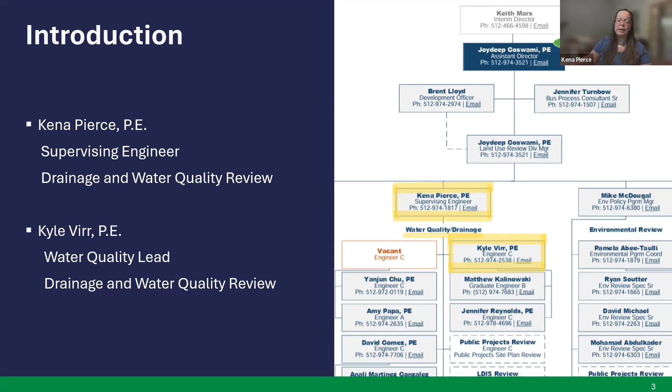Our team is housed in the Land Use Review Division in the Austin Development Services Department, and we do water quality and drainage review for site plans, subdivisions, construction plans. We do grading and drainage for residential review. We do zoning, easement releases, and license agreements, among a couple of other things. So we do a lot of drainage and water quality review for applications at the city. We're the main group that does it.

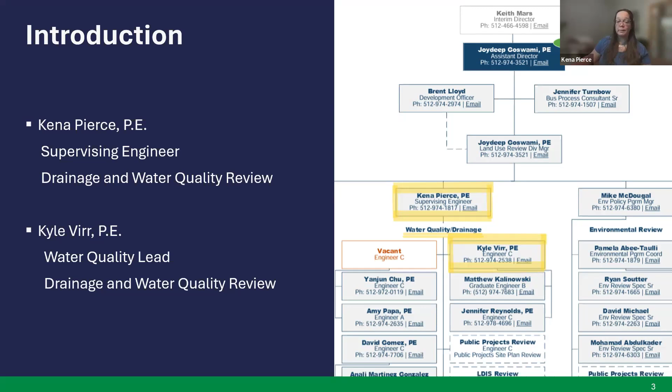Drainage and water quality is basically regulated by Austin Watershed Protection, but the review group for the code and criteria is housed in the Austin Development Services Department. And here's our little org chart. So I've got about 13 people on the team. So we're here to talk about stormwater today, and then specifically water quality.

If you are not in the industry, you might not realize that stormwater quality is different from wastewater, and it's different from water. Water and wastewater are regulated by Austin Water Utility. Stormwater in the city of Austin is regulated by the Austin Watershed Protection Department. They are two separate things, regulated by two separate entities. And the stormwater quality code is in Title VI of the Code of Ordinances. A lot of that has to do with point discharges and water from industrial sources.

And then there's Title 25, which is the Land Development Code, and it's regulated under the Environment section, which is Chapter 8. So regulation to address pollution in creeks, lakes, and aquifers associated with business activities and stormwater. We want our water quality to be really great when it goes into the creeks, so we have these regulations to protect our environment. And there's different categories of ways you can look at protecting and regulating it. One of them is the point source category.

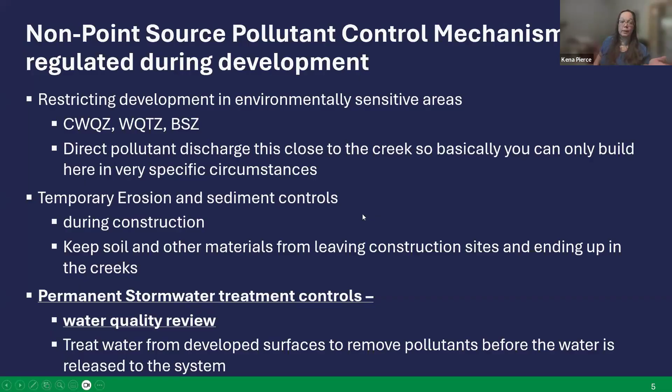So we're going to just talk a little bit about stormwater basics, treatment basics. This is super duper shallow, but you might be like, well, where do these stormwater pollutants come from? Basically, we're talking about increased pollution due to development.

So when you decide to put up a big giant store that we all love to go to, you are taking that green land that was there and covering it with asphalt, concrete, building. All of this is called impervious cover because it prevents water from infiltrating into the ground. And all of this impervious cover increases the concentration of pollutants on that property from daily use.

Think about taking your car, and I'm going to Walmart and I got my 2006 Honda CRV and it has a little oil leak. Well, then it leaks on the ground, water falls, and do we want that stuff hitting our creeks? The answer is no. So development just inherently can increase pollutant concentrations.

Again, the next one is like rainwater falls on this development, this impervious cover, picks up these pollutants and carries them off site. Where do they go? A lot of times you might not think about it if you're not an engineer, but it goes to the storm drainage system, which consists of pipes. It can be creeks, lakes, and this is called the gray funnel.

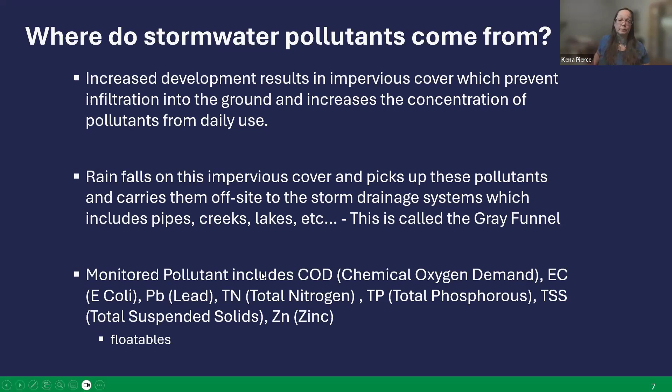Some examples of modern monitored pollutants are in the last bullet point: chemical oxygen demand, E. coli, floatables, phosphorus, and nitrogen. So these are the things that we're interested in. And how do we get these things out of our stormwater before it leaves the site? And there are 3 ways that we can do that.

In general, the first way is sedimentation, where the water comes into your pond and then all the pollutants basically settle to the ground. This is very common in wastewater and water treatment too. So settling of pollutants that are suspended in the water, and you have to make sure they're able to stay in that sedimentation basin long enough to have the pollutants settle out, which is a function of settling velocity and time in the basin. Another way to remove pollutants is through filtration.

And then a third way that we can help keep pollutants from leaving the property and entering our creeks is basically through infiltration. And you're like, well, what about groundwater? We can talk about that later. That is not shown on this slide, but this is really common in the Barton Springs zone.

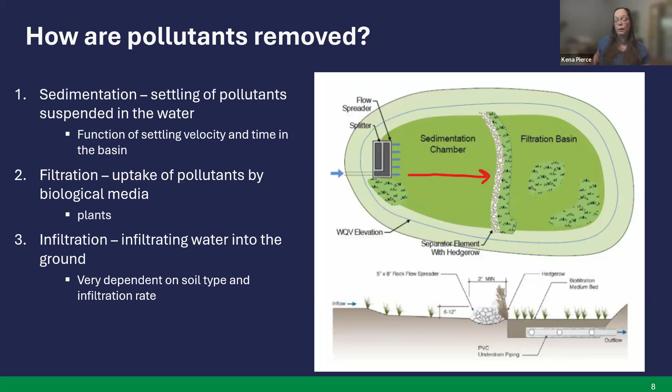So we're interested in removing pollutants from our stormwater. They're a result of development. And how do we regulate that development? We regulate it through site plan applications and subdivision applications. And when you come in with your application, my team gets it and we review it. And we decide whether water quality controls are required based on these rules in the Land Development Code.

Again, it's Chapter 8, which is titled The Environment. And if you look in this code, there's so many rules, but you can go to 211 and be like, does my development require water quality controls? And if you look at point A, if you are developing in the Barton Springs zone, then you require water quality controls.

So there's a very sensitive part of town called the Barton Springs zone. We have this blind salamander there, and we are very worried and making sure we are very sensitive to and making sure that it is able to thrive, right? So if you're in the Barton Springs zone, it doesn't matter the size of the development. You can put a giant store or you can put a little bitty gas station. You're required to have water quality controls to mitigate the pollutants leaving your site as a result from the development.

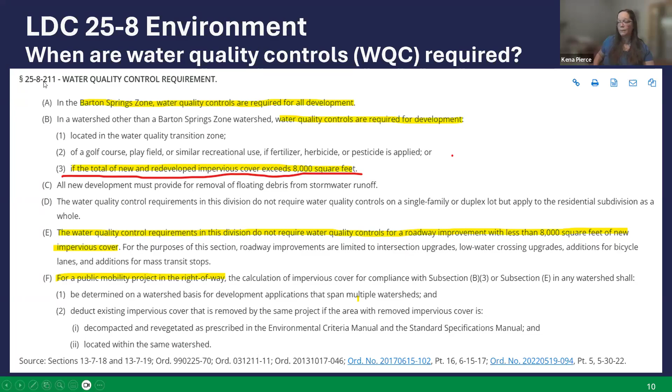Well, it depends. Like if you're at Wheatsville on South First, on South Lamar, you're not in the Barton Springs zone. If you're across the street at the Starbucks, you're in the Barton Springs zone. So it's very dependent on the geology, and it's basically all the area of town that goes to this one discharge point in Barton Creek. And then you're in the Barton Springs zone. And if you're in the Barton Springs zone, you are required to do water quality control.

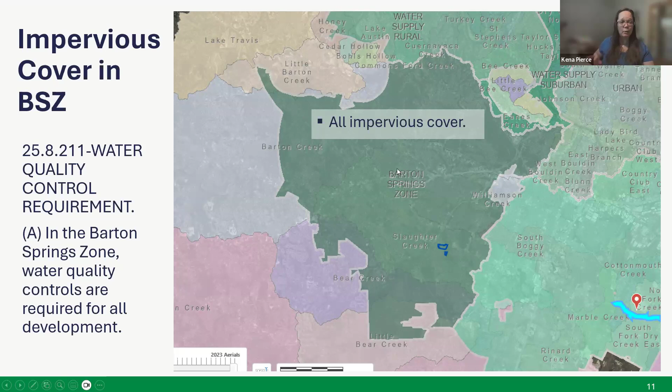So I just want to show you a picture. If you're on the east side of town, you're good. North side of town, you're good. Southwest, it's a little dicey. You might be in the Barton Springs zone.

I'm only doing 2,000 square feet. I have a small store and 4 parking spots. Outside the Barton Springs zone, don't need water quality controls. It's only 2,000. Inside the Barton Springs zone, need water quality controls. And then there's the threshold of 8,000. It doesn't matter where you are in town, water quality controls are required.

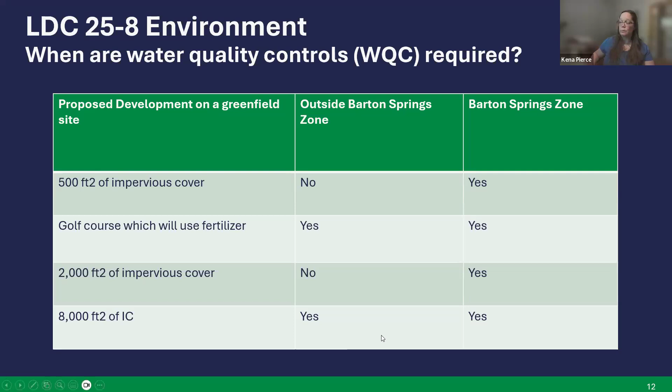We get this a lot. A development application comes in. They didn't realize they needed water quality controls. They didn't plan for it. Oh, can we get out of water quality controls? And the answer is no. You have to provide water quality controls if you are required to provide water quality controls.

Section 8 in the LDC has little caveats, they call them variances. So you must provide this unless you meet this condition, then you can get a variance. And that's in section 25-8-41. There's nothing that gets you out of water quality controls in that section.

And then there's another section of also potential variances. And there's nothing in there either that gets a development out of water quality controls if they need to provide them. So that is a difficult conversation sometimes to have. But water quality controls are very important to the city of Austin.

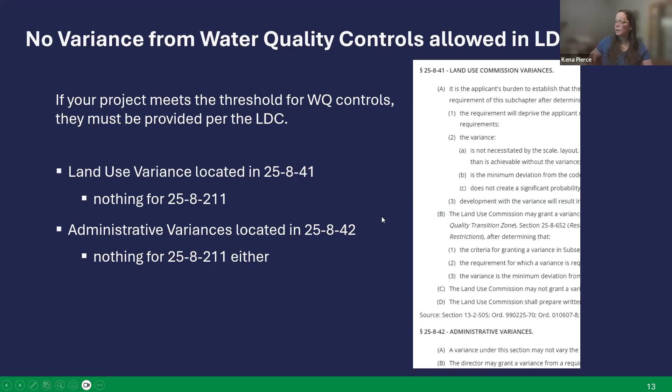This goes back to, I have to provide water quality controls. There's nothing in the code that gets you out of water quality controls. And just so you know, there's no way I can waive your water quality controls. Austin Development Services can't say, you know, we understand you, we don't think you need it. That doesn't happen because you have to provide water quality controls.

The regulating department, Austin Watershed, is the authority for the water quality control requirements. And they're going to expect you to provide water quality controls, but they do have a couple of ways where, instead of providing the ones that we usually see in the city, you can provide something else. And that's called an innovative management practice. And that's in 25.8.151. And there are lots of rules for that. Basically, you're still providing water quality controls, just a different kind than what we usually regulate.

Another item that I've seen come across my desk is alternative equivalent compliance. So say you are providing water quality controls, but they're just a little different. Maybe you're using something that we don't usually see used in that fashion. For instance, the airport has all these rules about not encouraging birds or wildlife. Well, a lot of our water quality controls are very popular with birds, wildlife, bugs. So they have to have special water quality controls that basically don't attract that kind of thing. They still have water quality controls, but it's an alternative compliance.

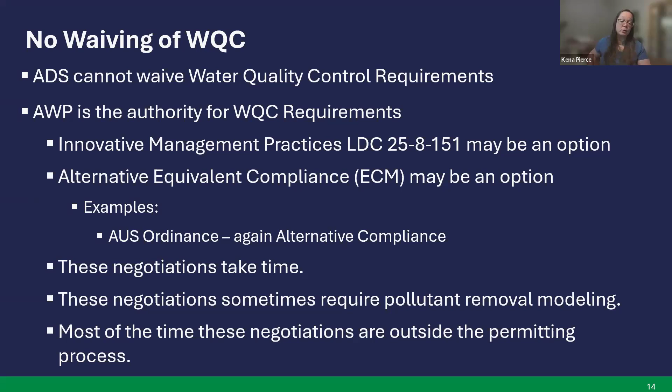If you are interested in doing a development, but you don't want to provide traditional water quality controls, you need to get that checked out before you submit your stuff, because negotiating these things takes time and they require advanced modeling. If you're just the everyday person and you're like, I want to put a gas station here, you probably just want to provide regular water quality controls, because to go through this other process, you're going to have to hire an engineer. They're going to have special modeling skills, because they're going to have to model how your proposed design removes pollutants to the city of Austin standards. We're very serious about water quality controls, right? And these negotiations can take time away from your permitting process. So that's important.

There is one area of town where you're still technically providing water quality controls per the LDC, but you're not putting a pond on your site. And that is when you pay money in lieu of providing structural water quality controls. So in the land development code, there's provide some sort of pond on your site. Or if you're in this super duper special group of development properties, you can pay instead of providing water quality controls. And I have here on this screen, hope you can see it, right in the middle, it says urban.

So in Austin, we have these different levels of watersheds. We've got the suburban, we've got the urban, we've got the Barton Springs zone. If you're in the urban watershed and you meet certain requirements, you can use a payment instead of building water quality controls. You're still meeting the land development code's requirement for water quality controls, but instead you're paying into this fee, and then the city of Austin takes that money and we either build new water quality controls or update old water quality controls that need maintenance.

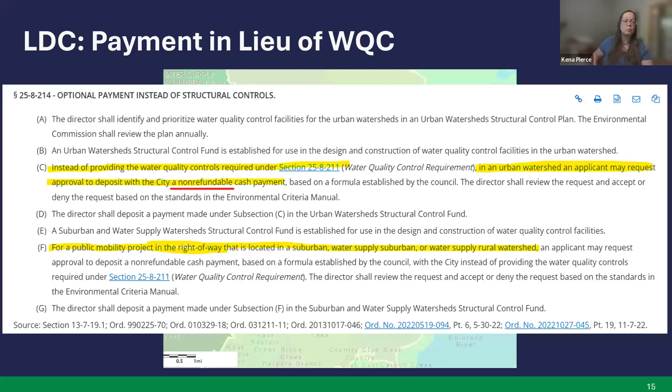I don't see it said here. Maybe it's in another one. But so there's provide water quality controls, or you can pay. So here we are, we have to provide water quality controls. And if you're interested, well, what are my requirements? That's in section 25.8.213, right here. It says it has to be designed in accordance with the Environmental Criteria Manual. So this is really important.

We have the Land Development Code at the city, and it tells us basically the rules we need to follow. And then a lot of these rules, you can go look in a criteria manual for, well, how do I meet these rules? So there's the Drainage Criteria Manual, there's the Environmental Criteria Manual, there's the Utility Criteria Manual. And for water quality controls, we look in the Environmental Criteria Manual, which we call the ECM. And it has all the information you need.

One of the most important is whatever control you provide basically provides the treatment of something called a sedimentation filtration system. All of our controls meet the pollutant level reduction requirements of this system. Another important thing here that gets caught during review is these systems need to be maintainable and they need to be inspectable, because the city will come in on your private property and inspect your water quality controls and your detention, because it needs to be working in order for you to be compliant with your permit.

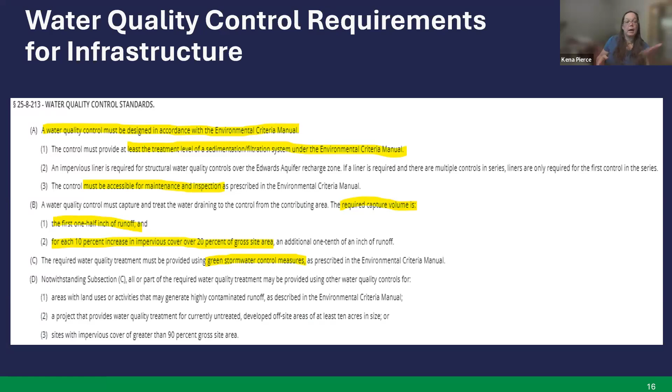This section also has how much water quality treatment you need to provide. That's section B. Basically they call this the capture volume, and it is quantified as the first 1/2 inch of runoff. And number 2, for each 10% increase over 20%, you add 1/10 of an inch. So that gets a little fun. Also, this new ordinance from, I think it was 2022, we have to use green stormwater controls. Okay. So you have to provide water quality controls. If you can't pay, then these are the requirements for your water quality controls.

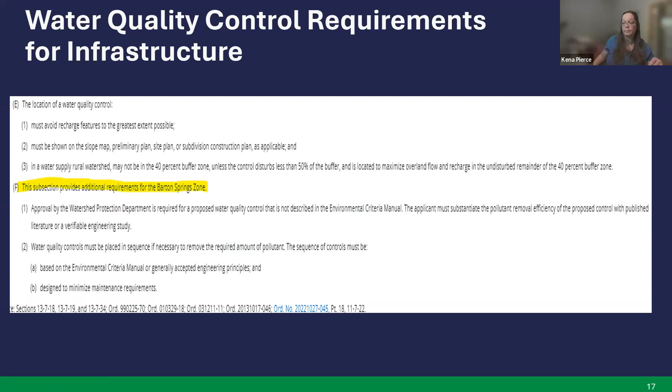This is a continuation of that section. Basically, you have to put it in a place where you avoid recharge features, difficult slopes or high slopes. And then section F is special for the Barton Springs Zone. Notice that the Barton Springs Zone has a lot more requirements. You have to substantiate the pollutant removal efficiency with published literature or a verifiable engineering study, unless you're going to do it through what we have in the ECM. So the Barton Springs Zone can be a little more challenging.

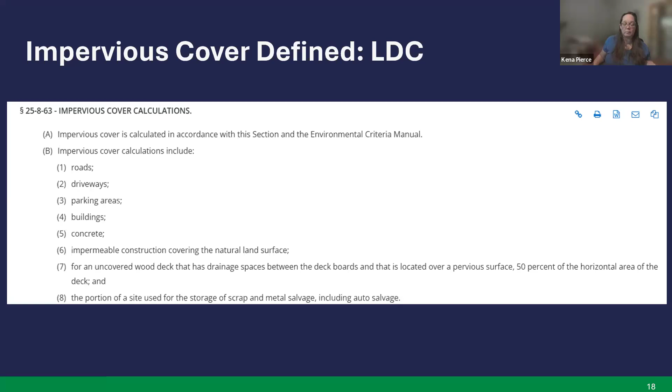So you're like, okay, I think I have to provide water quality controls, but it's all based on something called impervious cover. If you want to know how impervious cover is defined, that is also in the Land Development Code. So impervious cover is basically anything that blocks the infiltration of water into the soil. So roads, driveways, parking areas. You can think about it and go, is this going to block the infiltration of water? If it is, it's considered impervious cover. This is not an all-inclusive list. There are some exclusions to impervious cover.

So for instance, the sidewalks in the public right-of-way, we pretend like they're not impervious cover, so you don't have to provide water quality controls for them. Trails, the beautiful trails that we have all over town, they're not considered impervious cover for water quality control. They are for detention, it's a different problem. Your detention basins, the water quality controls that you install on site, we don't count as impervious cover. Any sort of drainage infrastructure. This is a fun one: ground level pools, fountains, and ponds are not considered impervious cover. Gravel placed over pervious surfaces. So this is not an all-inclusive list, but these are the most common ones.

So if you are a developer and you're like, okay, I'm getting close to that 8,000, you might want to check this list and see if you have anything that fits on it to remove some of your impervious cover as being calculated towards your water quality control requirements. And a lot of times we see trails and sidewalks. They're like, Kena, this doesn't count. You're right, it doesn't count. You do not have to treat this area for water quality. You do still have to do it for detention, but that's a different lecture, right?

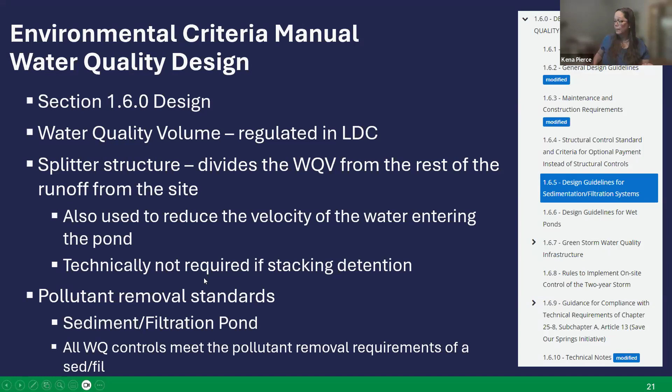The ECM also talks about the pollutant removal standards. I mentioned this before. There's a little section in the ECM and it gives the list of pollutants and what we want their concentrations to be after going through the pond. And it's all based on modeling. They made all the requirements based on how a pond called the sediment filtration pond removes pollutants. So we've got a lot of different options in the ECM that you could use on your site, but they all remove pollutants to the level of a sed fil pond, which is important. Because why do it if it's not going to remove anything?

So other examples of ponds are like biofiltration ponds. It's a large pond. They've got the sedimentation section, the filtration section. It was basically the picture I showed you earlier. These ponds take up space. They need something called under drains, which are pipes. They need special media. Sometimes they need retaining walls and plants. So if you have a large area that you're developing, like a Costco, you might want to do a biofiltration pond. You might want to look for the biofiltration ponds around town.

Another thing you could do, say you just have like a small development. Instead of a full-blown biofiltration pond, you can use a rain garden, which is basically one basin. They're smaller. They usually use under drains or pipes in them, but sometimes they don't, depending on your development and your soils. There's also vegetative filter strips, which is basically a big grassy area where you spread the water, and it's supposed to only move over there at a certain rate so pollutants can drop out, right? So there's lots of different options, and they're listed here on the right.

So retention irrigation systems are what is required to be used in the Barton Springs zone. Vegetative filter strips, biofiltration ponds, rainwater harvesting, you know, the big cisterns on the side of the buildings, porous pavement.

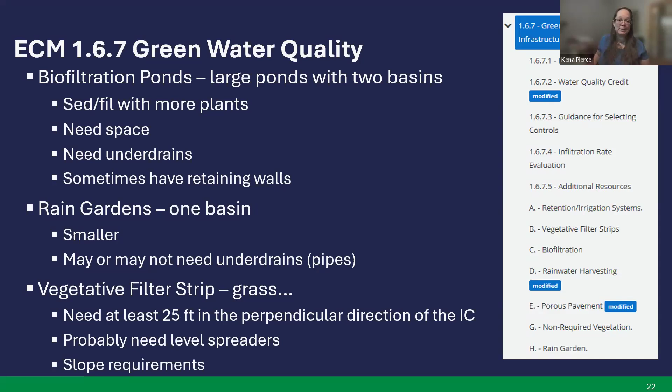And then rain gardens. Rain gardens are super popular. They're very easy. There's always room for a rain garden. It's what our water quality lead says.

These are just some of the things that come up when we do reviews. I'm not going to go over the design aspects of ponds. If you want to know a lot about how to design water quality ponds and how to interpret the ECM, let Bianca know so she can set up a different webinar. This is just basically on when we require water quality ponds and a little bit about the design. But this slide is about what happens in development when we're reviewing something. These are some really common items.

We can't capture this area, Kena. It's a driveway and it runs off into the street. That is so common, but don't worry, we can help you out. There are a lot of different options. Maybe if you can't capture this area, you can capture an equivalent area that's not being treated, and instead capture that area and take it to your pond.

And interesting to note is this is really common. It makes complete sense. Oh, Kena, our water quality pond only needs to be 4,000 cubic feet, and we're providing 6,000 cubic feet volume of treatment, and we're over treating. Unfortunately, over treating is not a thing because we want to only treat the first flush of water that falls on the ground. That is where all the pollutants are. So that's something else that comes up. I can't treat this area, I'm going to over treat this area. We'll usually work with you and figure something else out because that's not going to work.

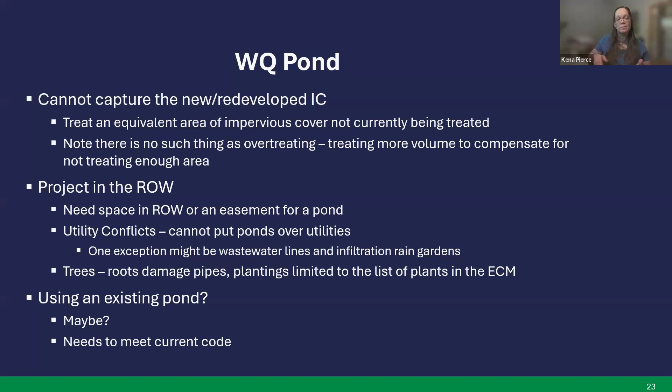Another thing we see when we do review is, oh, I've got this old pond from '97, I'm going to use it. Yes, you're welcome to use it. We do have to make sure it still provides the level of treatment that is required today, unless you have a vested rights situation. But a lot of our ponds around town are old, and some of them actually still work. So that's something that we work with in review also.

I need to get moving because I think it's almost done.

Some important items that affect your pond design are the maintenance, right? You've got to be able to get in there. You've got to be able to mow. You've got to be able to clean out the splitter box. That's something that we see. We have all sorts of requirements in the DCM, which is not the ECM. In the Drainage Criteria Manual, we have a lot of requirements for detention ponds and water quality ponds. All of this stuff ends up making the footprint of your pond bigger.

And I apologize because I know you want every square inch for your house or your apartment or your parking. We're not required to have parking, but I prefer parking. But anyway, it does make your pond bigger, but it's really important because if your pond doesn't work, you get in trouble because you have a notice of violation.

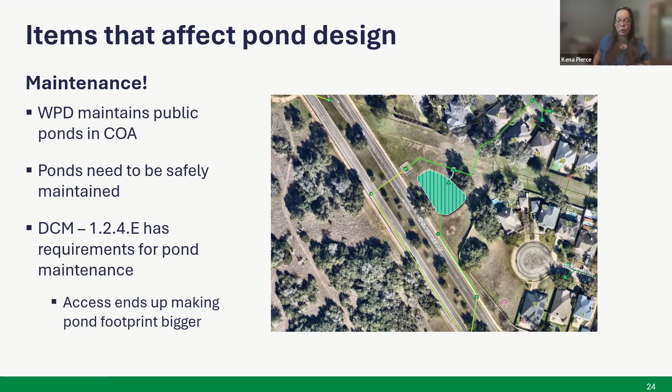So that's something that's important to think about when you're doing a water quality pond. I'm just going to rush through these examples. Here's an example of a water quality pond off South Slaughter. If you're down this way, you pass it, you probably don't notice it. This is an example of a sand filter pond. You can see these pipes right here. Well, maybe you can't see them, but there's little pipes back in the back. This is the filtration section. And then we have the gabion wall.

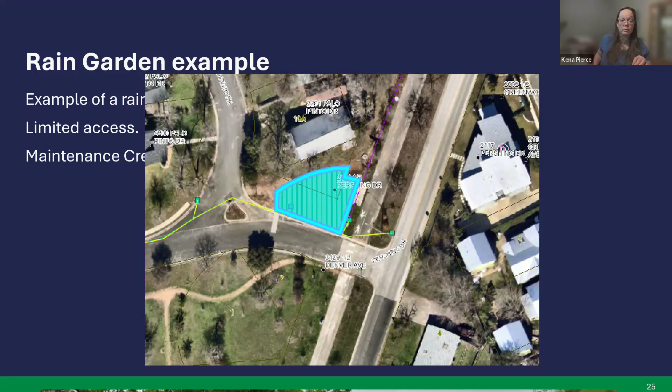This is an example of a rain garden. If you're on Property Profile, which is the city's GIS, city-maintained water quality detention ponds come up with these green hatch-striped polygons. And this is an example of one. You probably drive by this every day and you're either like, that person needs to mow their lawn, or that's a really interesting garden. It's a rain garden and it is here to provide water quality for probably this street.

I haven't looked at this one yet, but in this case, you notice there's no place around the water quality pond to park or to maintain it. So you've got to park on the street. But that's just a little bit about water quality controls.

And if you have any questions, please feel free to reach out to Kyle or me. A lot of times, if people are getting ready to submit something and they're like, I need help with this, we are completely available to meet. It's not a problem. We are here for you. Thank you.